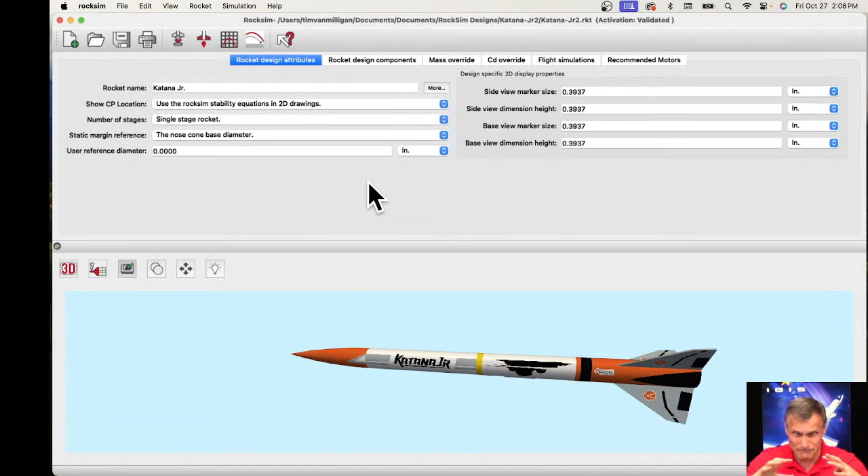But we've been designing RockSim, particularly RockSim Pro and the Launch Visualizer. They're three-dimensional, and we bought the maps of the Earth. We use Bing Maps, maybe I'll show you that in a minute, to generate the Earth like it's a globe, but we don't have that for the moon.

I think Google has those maps available, but they don't have an API that we can plug into, which is why we're using Bing and Microsoft rather than Google. I like the Google Maps better myself, but Google doesn't make them available to people like us, whereas Microsoft doesn't care. So we're using the Microsoft Maps. If Microsoft had a moon map, we probably could do it.

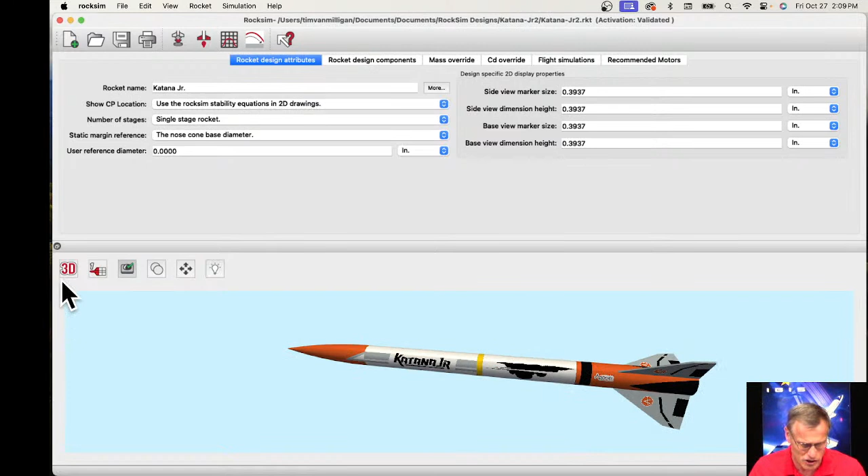Sturk03 has a question. Can you run a dual deploy in RockSim with a drogue parachute deploying at apogee and then a Jolly Logic deploying at 500 feet? Will it give accurate data? Okay, I got the Katana Junior here, and the Katana Junior isn't actually a dual deploy rocket. We have two parachutes in here, one down here and one up here. So he wants to know, how do you set it up to do a main parachute at 500 feet?

So the question is, how does regular dual deployment differ from chute deployment with a Jolly Logic Chute Release? For those of you that don't know what a Chute Release is, if you come to the Apogee website and type chute release in our search bar, it pops up. So this is the Chute Release, and what it does is it reefs the parachute. There's all the parts. Basically, this is the little electronic gizmo, and there's a rubber band and a pin.

You take this part and you wrap it around your parachute. There's the pin. You wrap it around, there it is. This is a little altimeter, and you can set the altitude at which the pin is released, and then it unwraps the rubber band, which releases the parachute so it can deploy. So basically, it reefs the parachute and prevents it from opening until it gets to a certain altitude. It just uses a rubber band; there's no pyrotechnics in there. It just pops it out.

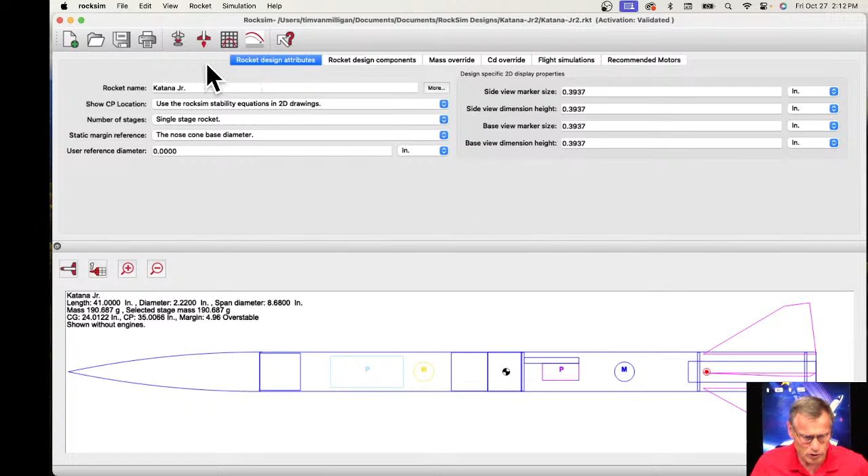A typical dual deployment will have electronics here in the payload bay, and a parachute on this side and a parachute on this side. To run a dual deployment, we load rocket motors. I'm going to choose a rocket motor, it doesn't really matter, the F20. Then you go to flight events, and I have two parachutes. The first parachute is 12-inch diameter, so I'm assuming it's this one right here. And then there's one over here. This looks to be bigger, so that's 24.

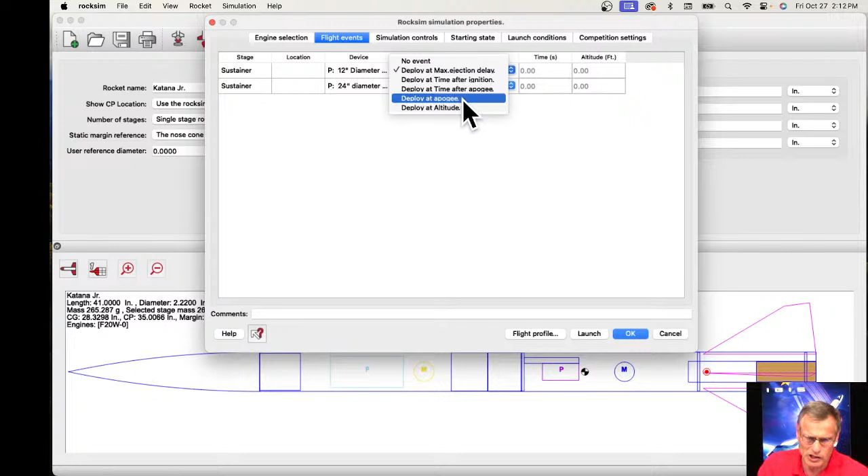My first one I'm going to deploy at apogee, and the next one we will deploy at an altitude, I'm going to guess 500 feet, but we have to make sure the rocket goes that high, and I'm not sure this rocket with an F20 is going to go that high. We'll find out pretty quick. Looking at the starting state, the rocket is on a 98-inch launch rail. We'll probably make it 60 inches using a launch lug. Launch straight up.

We're at an altitude of 700 feet. I like to run my simulations at 700 feet, just because that's kind of like somewhere in Iowa, so kind of the middle of the United States. So that's kind of how I picked it. It's nothing really special. You can choose wherever you want.

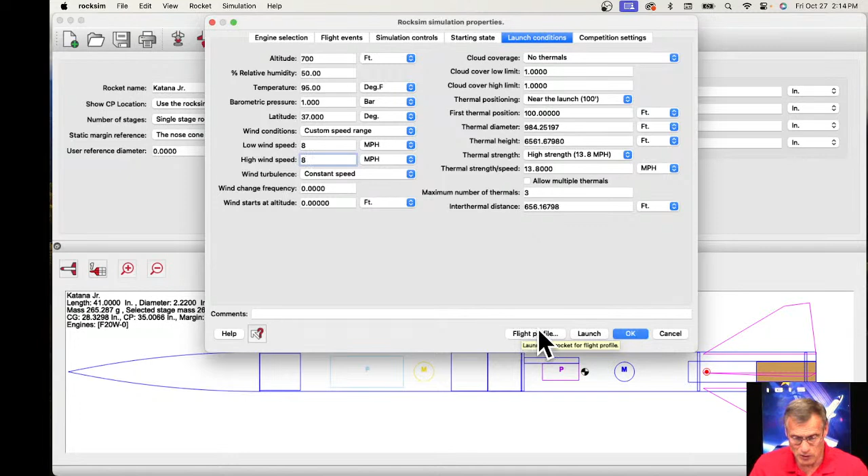And I'm going to have a custom speed range. What I'm going to do is set both of them at 8 miles an hour. So basically, this means it's a constant wind blowing across the field at 8 miles an hour, which is fairly breezy. And then we launch it. And it ran the simulation, and I'm peeking here. We went 2,026 feet. So our rocket did go greater than 500 feet, which is good.

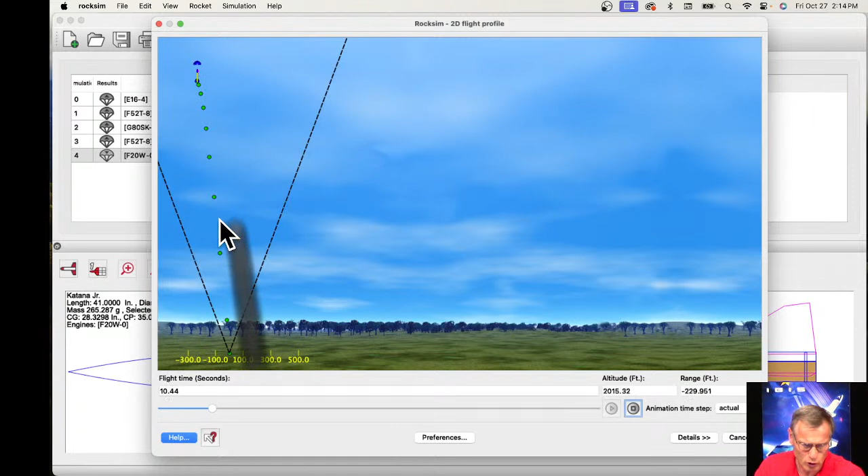So I'm running the simulation by clicking the start button over here. You can see the rocket taking off. This is the smoke drifting. So about this altitude, the motor burned out, and then it coasted. And then we have the first parachute deploying at apogee, and when it gets down to 500 feet, and you can see down here, I'm looking for 500 feet, the main parachute will come out.

Now the image of the rocket in RockSim doesn't change, so the parachute's not going to change. But what you'll see is the trajectory line is going to go more horizontal when we get to 500 feet because it's a bigger parachute. So basically it's drifting with the wind as it's descending. And since it's descending slower and the wind is blowing it, it's going to kind of change course. So we're getting close here.

All right, so now we're below 500 feet and you can see something change. See that little dog leg? This is typical of dual deployment rockets. And so then the rocket's going to come down. I'm just going to speed it up here, and it landed down here. So now you can really see the dog leg. These dots here in RockSim are 1 second apart. They're closer together here because the rocket is falling slower. So that's a typical dual deployment rocket.

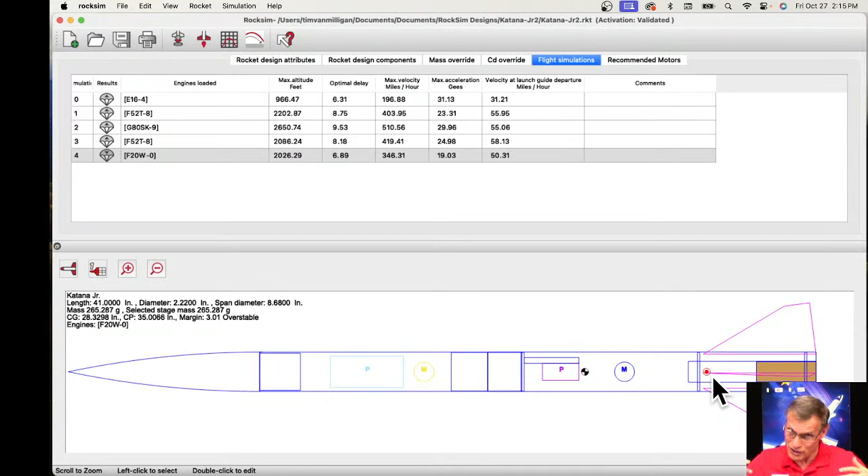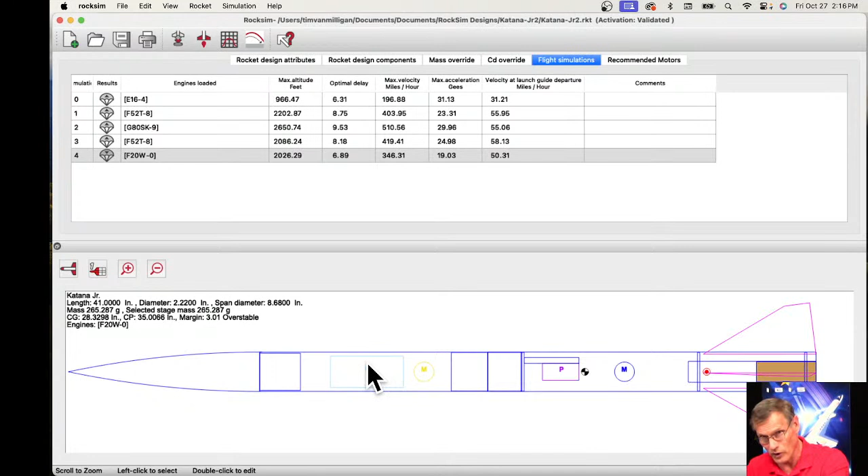So how do you set up a Jolly Logic differently in RockSim? And the answer is it's identical. We just launched a Jolly Logic Chute Release in RockSim. The only thing is that the parachute is still in the tube. So basically we have to move the parachute in the rocket to where it can come out of the tube. RockSim doesn't care. The flight event says deploy the parachute out of the rocket, and that's what we did. How it gets out of the rocket, RockSim doesn't care. It's not smart enough to know. You have to know yourself that the parachute has to be pushed out of the rocket.

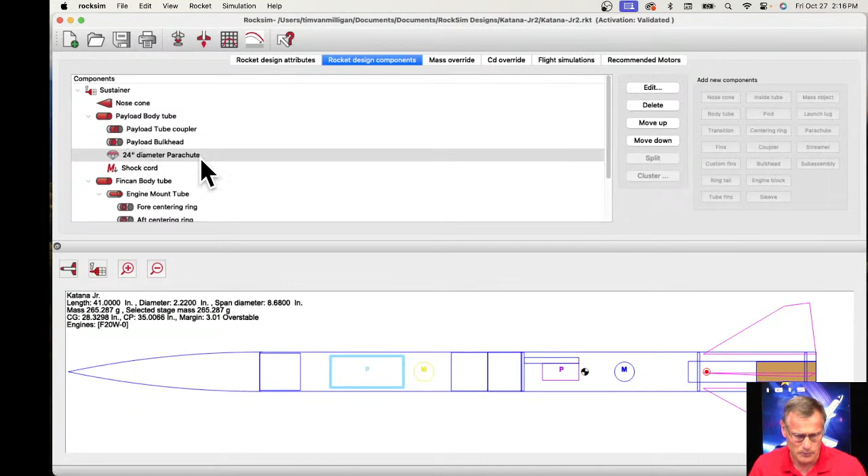Now, if you're smart, what you would do, as I said, is take this parachute and move it into a location where it can be pushed out. So I would find this parachute, and you can just click on it. It tells you where it is in the parts tree. Then you can just double click to open it, and then we can change the location. You can see I can slide it around, and I can slide it into that back tube.

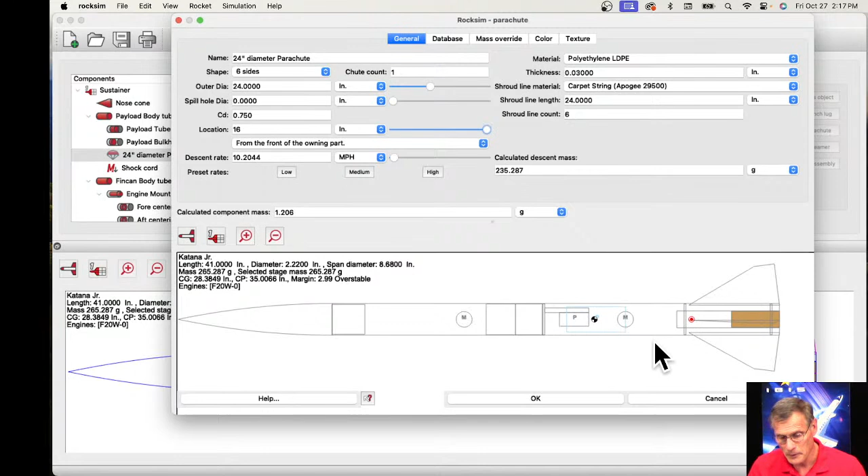I've moved the slider as much as I can, but here's the trick. You can always type in a number that's greater than what the slider bar allows. So if I type in 16 inches, you can see my parachute, this nice light blue parachute right here, move further back in the tube. And basically, we've done a deployment with a Jolly Logic. Running the simulation is identical, so you don't have to change that. But that was a nice, easy question for me to start out with.

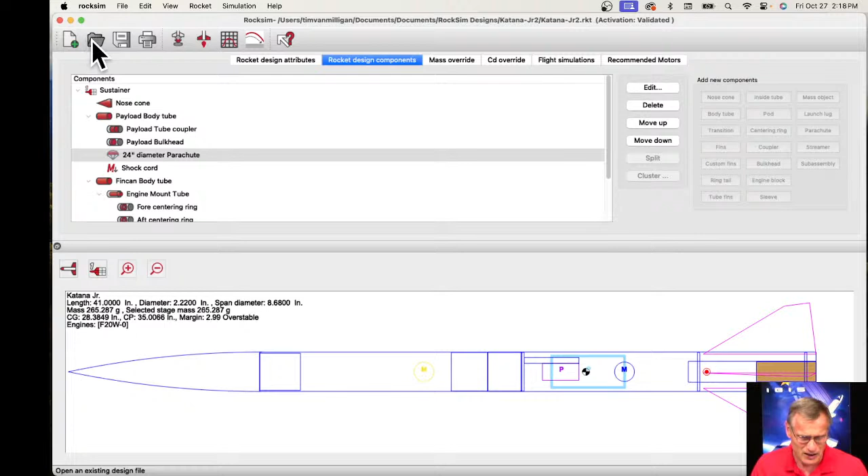Jeff Gortowski says, I imagine Heli-Rocs are just really long strakes for simming. Yes. Because we can't simulate a rotating recovery device in RockSim. That's just so complicated. So if you look at the Heli-Roc design in RockSim, you would find that what looks like blades are just fins, and fins can't be deployed.

So let's see if I got the Heli-Roc here. So basically, it looks like the rocket going up, but coming down. Heli internal blades. I don't see it.

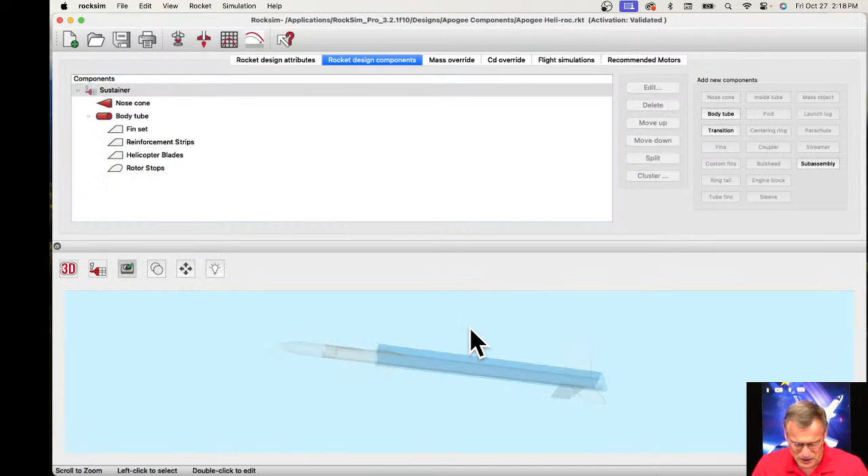Let me type it into a search bar, and then let me scroll down. Heli-rock. So open that up. Do I want to save that one? No. Okay, so this is what the Heli-rock looks like going up, and these blue blades are actually fins. You can see this is right up here. It looks just like a fin set, and basically that's how we put it in.

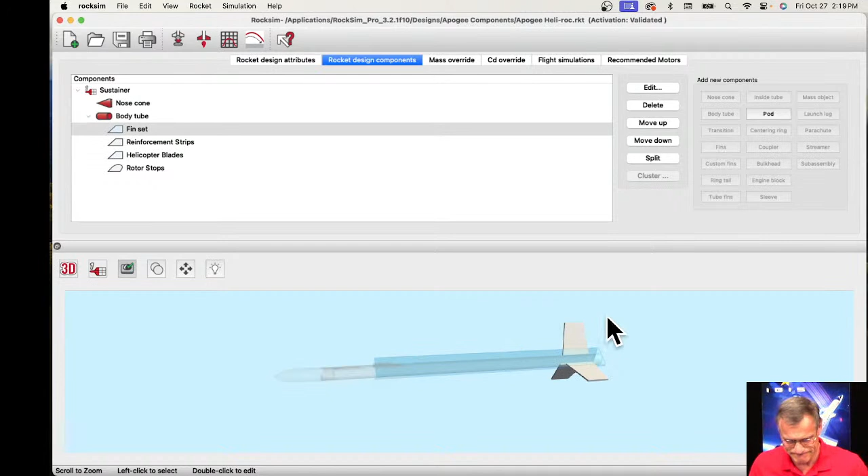But it doesn't spin coming down. So basically in this configuration, we can get a prediction on how high it will go, but we can't predict how slow it's going to come down because I can't spin the rocket coming down. But that was a pretty good observation.

Jeffrey's talking about the moon. The chute has nothing to do on the moon. Yeah, deploying a parachute on the moon, not going to do anything.

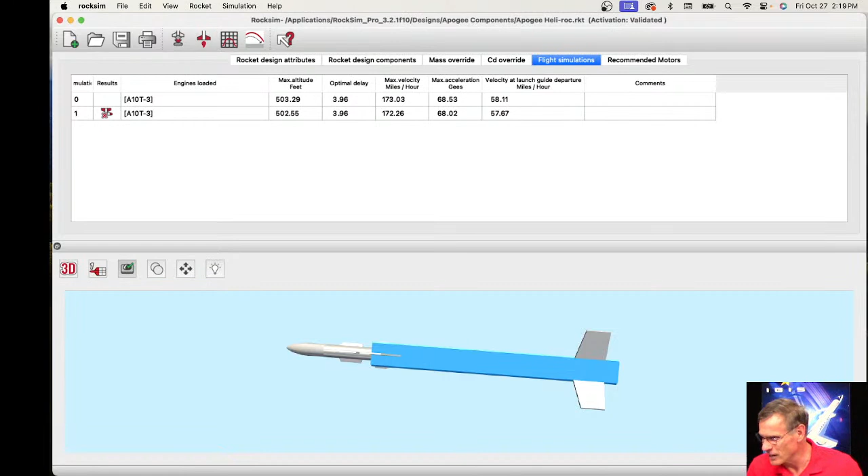Julie Kaufman says, how to start a design for a level 3 rocket. Okay. Well, designing a rocket, it doesn't matter if it's an L3 or an L1 or your very first rocket like an Alpha. You're going to start out designing it the exact same way. So basically, when you're designing a rocket, what I do is draw a picture of the rocket on a piece of paper. Just sketch something out, what you think it's going to look like. From that, now you need to start selecting parts.

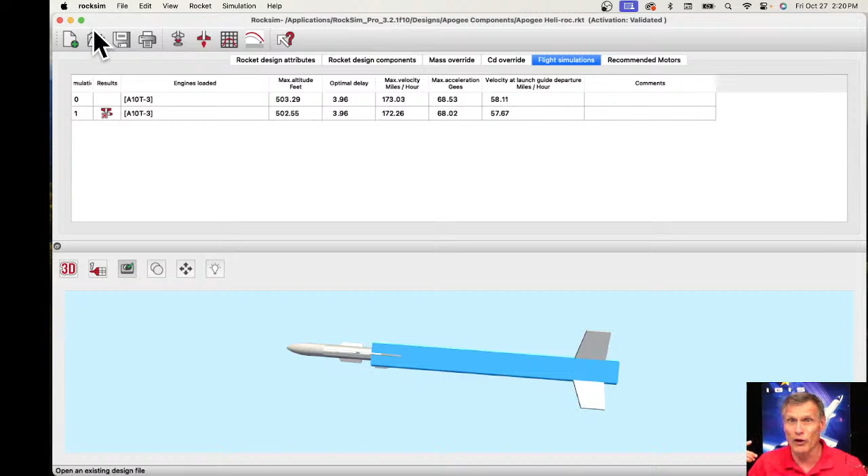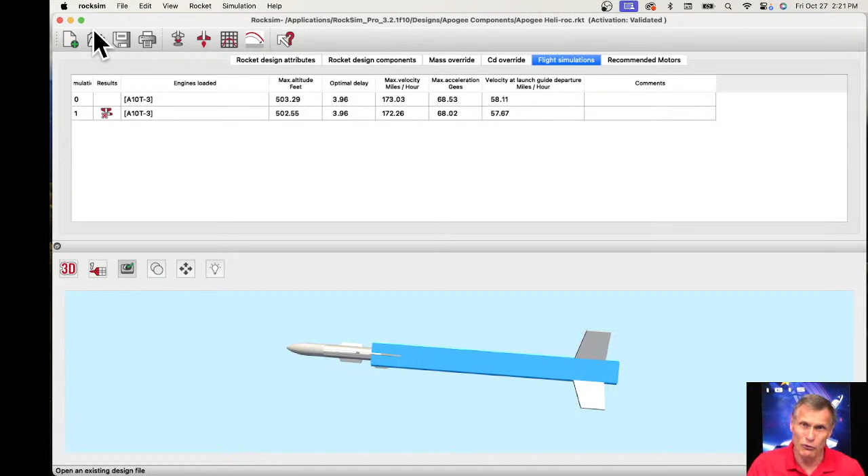So now an L3 rocket, that's a big rocket. L3 means you're flying an M motor or bigger. So you can do an M, an N, and an O. So you're going to be talking big components. An M motor is 4 inches in diameter. So at a minimum, the rocket's going to be 4 inches in diameter. Typically, they're going to be bigger. So now you got to find parts.

So what I would do is I would go to the Apogee website. What we're looking for is just parts to design our rocket from. And then once we have some parts, mainly the nose cone, then we can start going into RockSim. So I'm going to go down, click on the shopping menu, come down to building supplies, and then come over to nose cones. So here's nose cones.

And so it has different sizes, 24 millimeters, which is about an inch, 29 to 54 millimeters, about 2 inches, 56 to 98, so 98 is 4 inches. So this is kind of like the smallest nose cone. And then there's ones that are 5 inches or larger. So for me, and this is your personal preference, is how big of a nose cone do you want to use?

I did an L3, and I used the PNC 7.51. So this is a big nose cone, and you can see the nose cone length. It's 22 inches long, and that's from the shoulder to the tip. It's 7.6 inches in diameter. So now I have a nose cone. So now I can start going into RockSim.

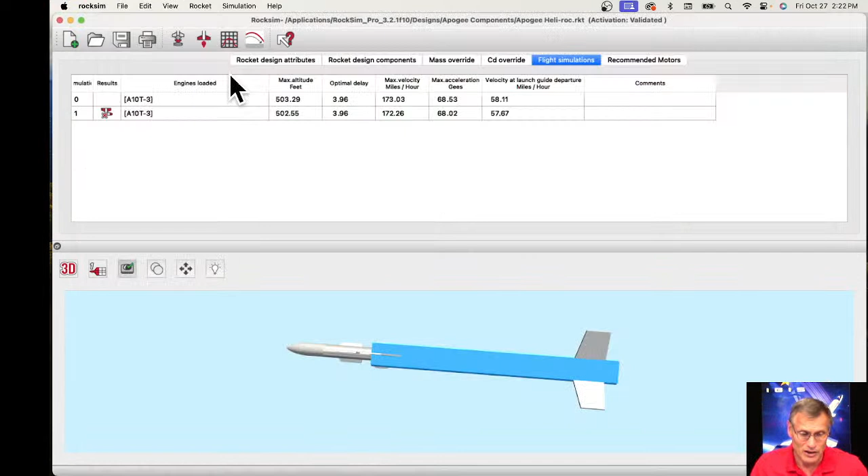So in RockSim, I would start out by doing a new design. So click on the new button over here, and it's going to ask if you have a design open, whether you want to save it or not. I'm not going to save it, so I'll just click no. So I'm going to start a new design, and we're going to work across these tabs here. So the first one is the rocket design attributes, and we might give it a name, L3 rocket. And we're going to use the RockSim stability equations.

The side view marker size, this is like the CG symbol and the CP symbol. Right now, they're going to be drawn at 0.39 inches in diameter. That's good for a small rocket, but when we got a big rocket, we're going to be a 7.5 inch tube. I want my marker size a little bit bigger. So this is just a little tip. I'm going to make it 2 inches in diameter. You don't see anything yet, but you'll see it soon.

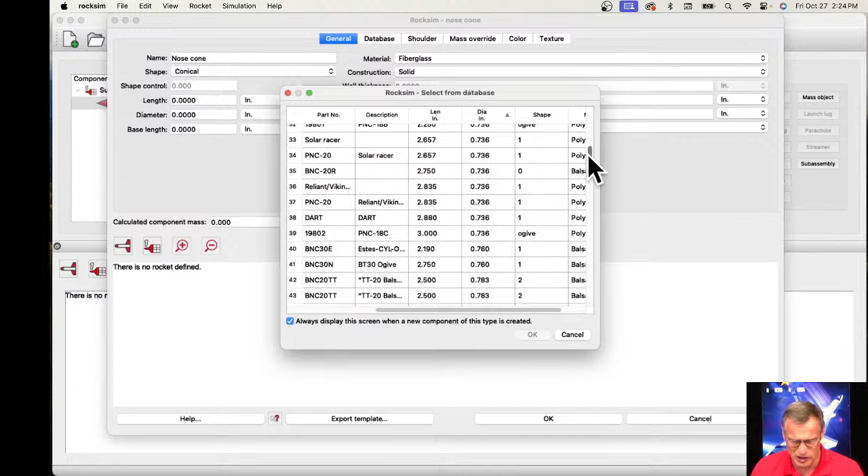So you can see my center of gravity symbol is pretty big, and my center of pressure. So that's what I wanted to do. I wanted to make them big. If you would have left the side view marker size small, they would be like really tiny. And I want to be able to see them.

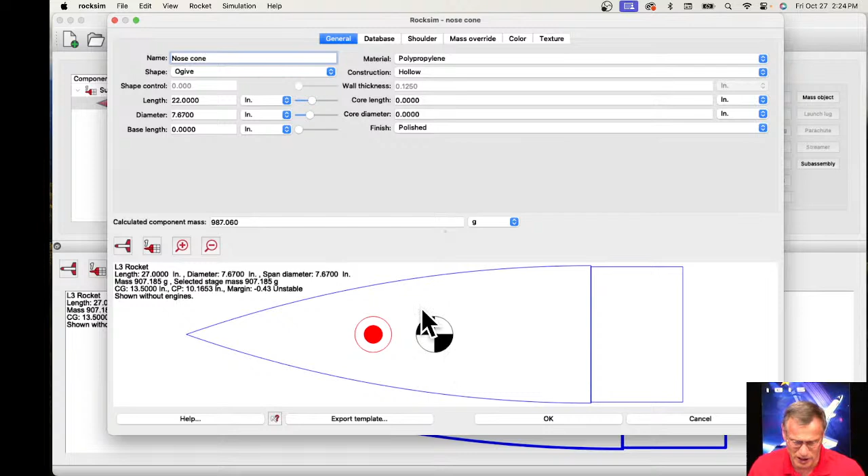So then I click OK. Next component, we're going to add a body tube. So when I design a rocket, I start at the top and work down, so the tip of the nose cone down to the bottom of the fin.

So let's put in a body tube, and it's going to, again, look in the database, and I want to get that outside diameter at 7.67. So I'm just going to scroll through the list. I'm looking in this column right here for the big 7-inch tubes, and you can sort it. There we go. So I can choose this one right here, 7.51 inch. Click OK.

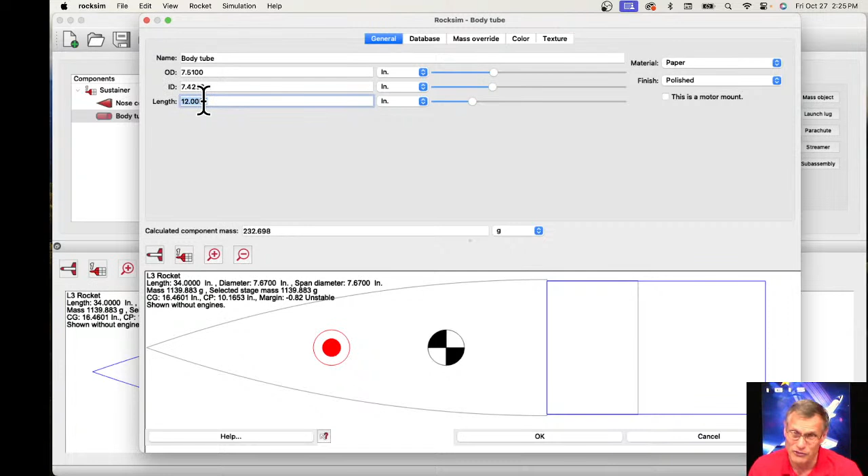And it loaded it, but it's pretty short. It's only 12 inches long. So now from here, I'd make it longer. Let's make it 60 inches long. Maybe let's go 80 inches, another 20 inches. I want a little bit longer. This is again my personal preference.

I want to design a rocket that's stable, and I know that a length to diameter ratio of about 10 is going to make it pretty easy to make it stable. So if my diameter is 7.67 inches, then I want my length of the tube 10 times that. So at least 76 inches, and I made it 80 inches. So that's kind of where I got that number of 80 inches. This is not going to be the motor mount tube. We're going to put a motor mount tube in here later.

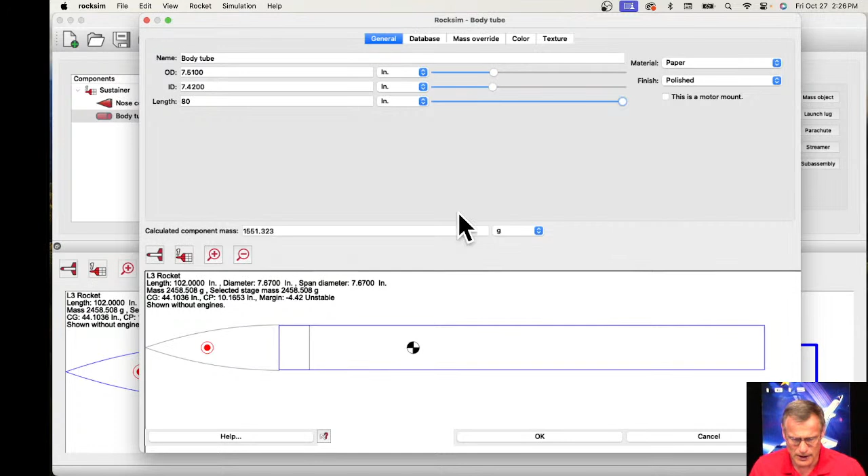And I'm going to change the color. This is my 3-dimensional color. I'll make it orange. And the 2-dimensional color, let's also make it orange or yellow. I'll make it yellow. Click OK. Oh, yellow's a hard color to see. There, make it a darker yellow. There you go, now we can see it.

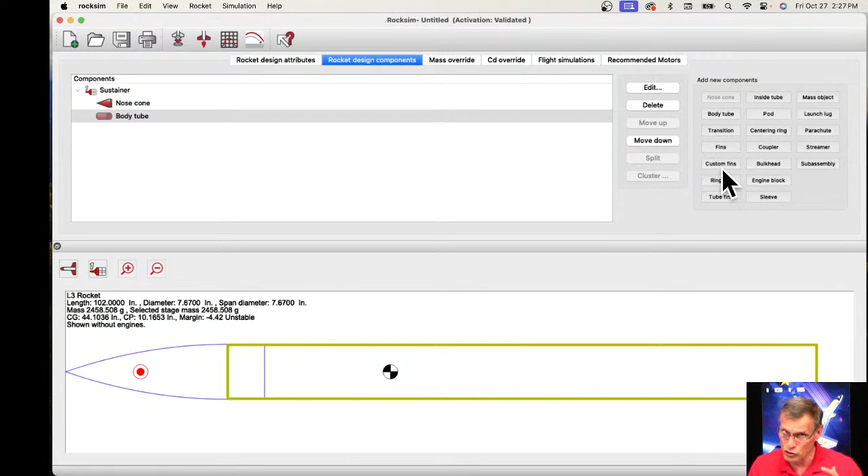All right, so now I want to add fins to my body tube. So I have 4 choices of fins. I have regular fins, which are trapezoids or elliptical. Then I can do custom fins, which are any shape other than or including trapezoids and ellipses. Then I can do ringtails or tube fins, but I'm going to do just regular trapezoid fins.

And it always looks in the database, and I'm going to cancel out of that. Once it's done looking in the database or you canceled out of it, RockSim is just going to draw some generic fins on here as a starting point, and that's all it is. So now you can start changing, and I think these fins are massive. Each fin is 15 inches long. That's wider than any piece of plywood that I have.

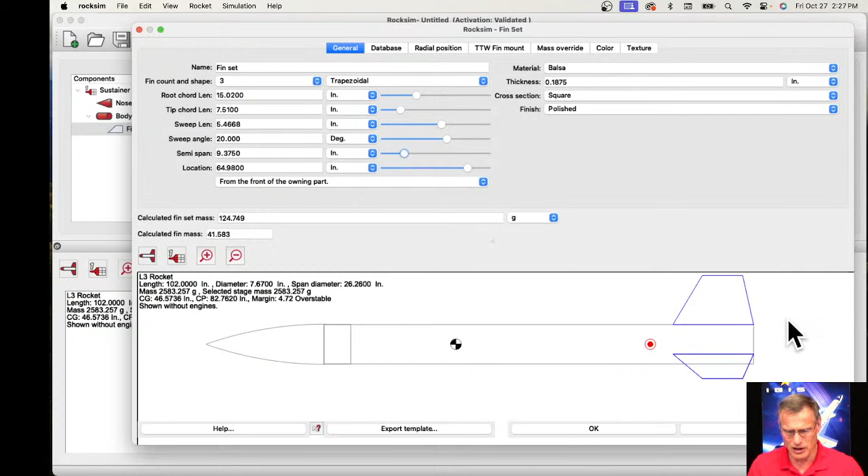So I'm going to make it like that. And that actually looks pretty good to me. I'll just leave everything else, but you can move the slider bars around and change the shape to whatever fits you. Next, select the material. Since this is a high power rocket, balsa fins, probably not a good idea, because balsa is probably not going to stand the stresses of a high power launch.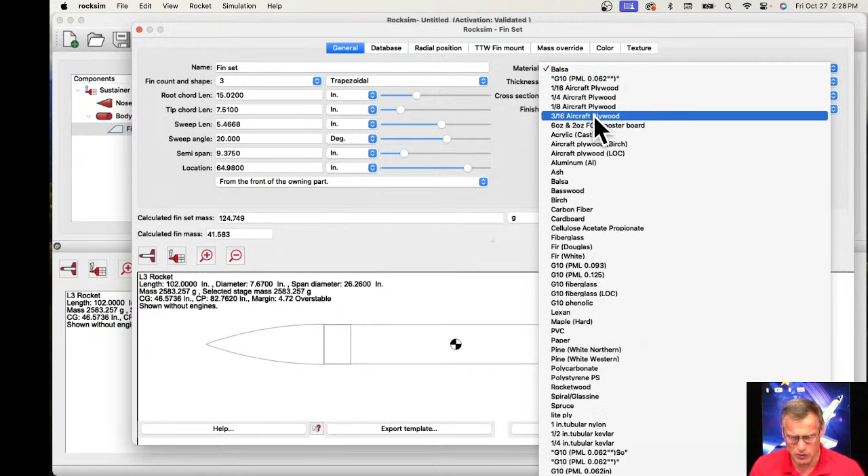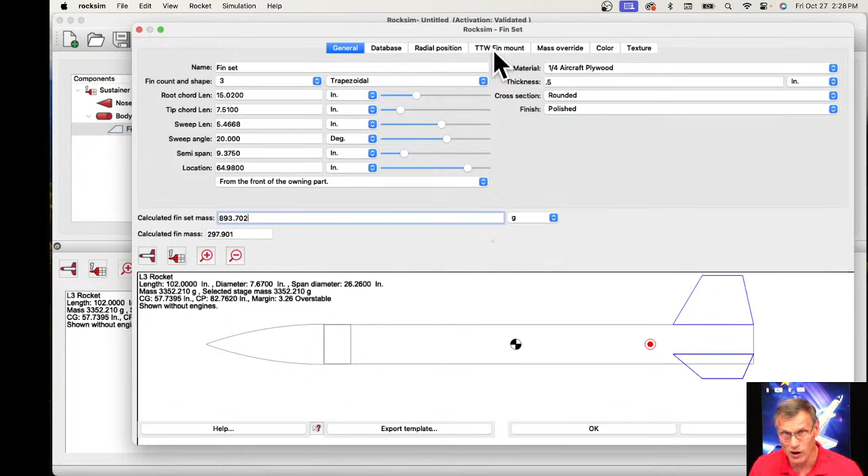So I'm going to make these plywood, and I'm going to use a 1/4 inch plywood, and I actually might make these even thicker. I'm going to make them 0.5 inches thick, and I'll make them rounded on the front edge and the back edge, so a little bit more aerodynamic. And then we'll come back to through the wall in a minute. The color, I think we had orange, and let's make this one that color. Okay, so there's my fins on the rocket. Rocket is coming along pretty good.

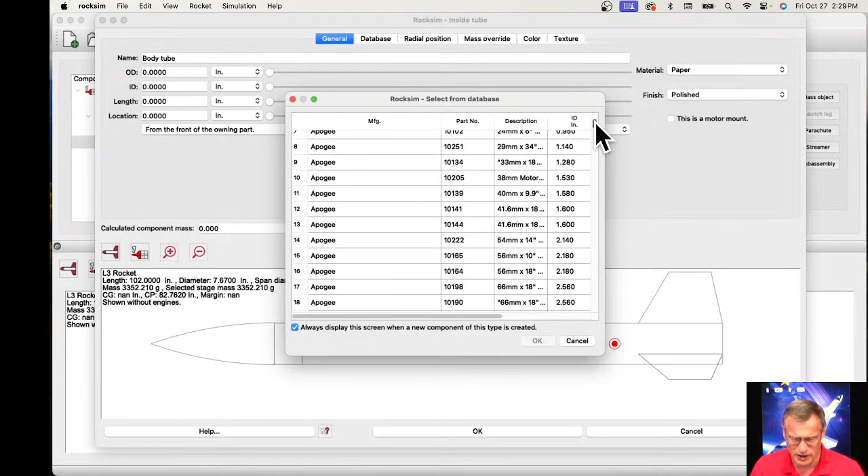Now we need a motor mount inside of it. So I'm going to highlight the tube and do an inside tube. And now we're looking for a motor mount that can handle a 98mm rocket engine. So that's 4 inches in diameter. So I'm looking for something that says 98mm or that's an outside diameter of 4 inches. So we'll use that tube right there. Click OK. You can see it drew it right here.

It's in the wrong spot. So I'm going to change the reference location from the front of the tube where it is right now to the back of the tube. And by doing that, I can change the length of the tube and the motor mount will follow it. So now I'm going to move this all the way to the back. So it's 0. You can see now my back edge is at the back of the tube. It's 34 inches long. I think there should be enough area in here for a big parachute. We're going to say this is a motor mount tube.

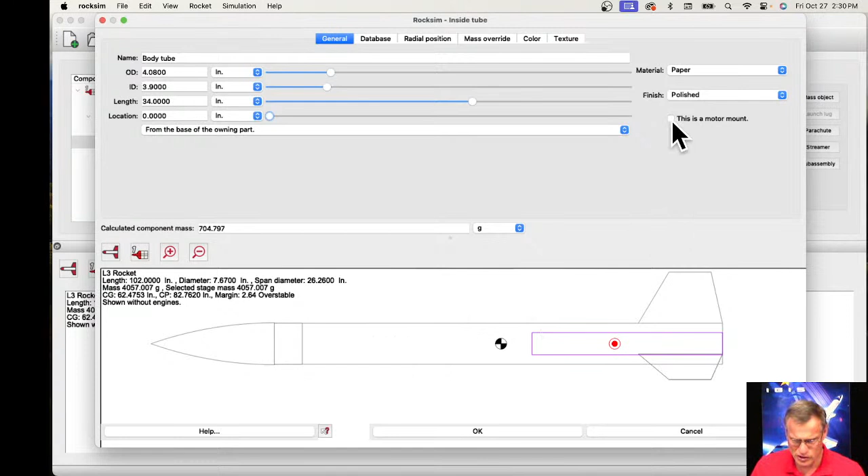And let's change the color. My rocket's going to be orange with a blue nose cone. The 2D color doesn't really matter.

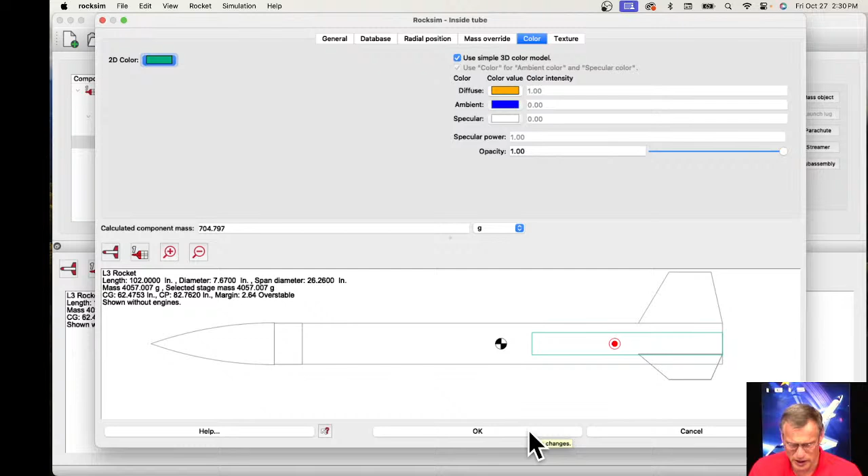Click OK. So now we have the motor mount tube. Now we need fins, or not fins, centering rings. So we're going to put some centering rings in here. So I'm going to click on the body tube, come up here to centering rings. I'm looking for the component centering rings right here. Click on that. We're going to cancel out of the database. We're just going to let RockSim calculate it for us.

And it's already calculated the outside diameter at 7.42 inches. It knows the inside diameter of that tube. This green line right here is the centering ring as it is right now. Again, I'm going to make these pretty thick because they got to be strong for an M motor. So it's a 1/2 inch.

And this is where it takes a little bit of experience. You know, this is why there's a certification program, because as you go up the levels, you gain experience, and then you know from your own experience that thin plywood is probably not going to withstand the forces of flight, and I need to make it thicker. So my thickness is based on my experience.

And then I'm going to change again the location from the base of the owning part, and then I'm going to slide it back and watch what happens to the inside diameter right here when I slide this ring over this tube right here. You'll see that the inside diameter suddenly changes. So RockSim is pre-calculating that. So this is my front centering ring, so I'm going to put it like right there.

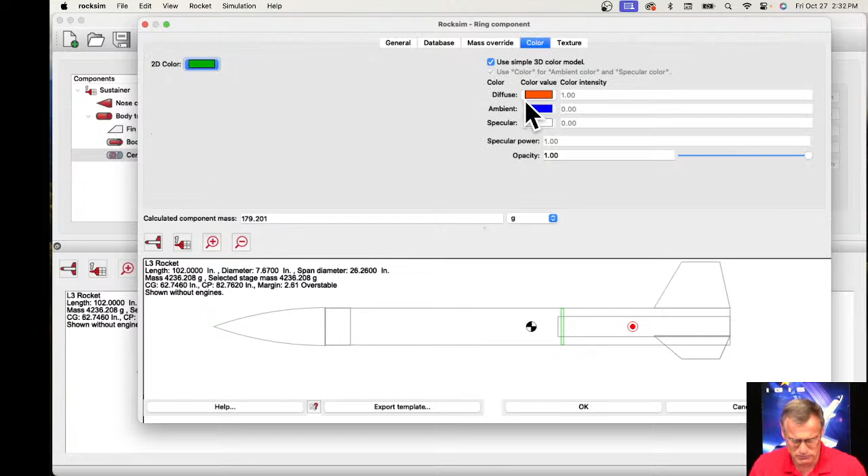Again, it's plywood, and color is fine. Click OK. So there's my first centering ring, and now I'm going to do another centering ring, and this time I'm going to do a copy and paste. So I'm going to highlight it, and then I can go either to the edit menu and copy, or I can do a right click with the mouse, and it brings up this contextual menu. And then from that, I can select copy.

And then I'm going to paste it onto the body tube. So I'm going to highlight the body tube and then bring up the menu again and hit paste. And you can see it put another ring here, but it put it exactly on top of the first one because we just basically copied it. Now we need to edit the location. So I'm going to double click on it. And I'm going to change the name to aft centering ring.

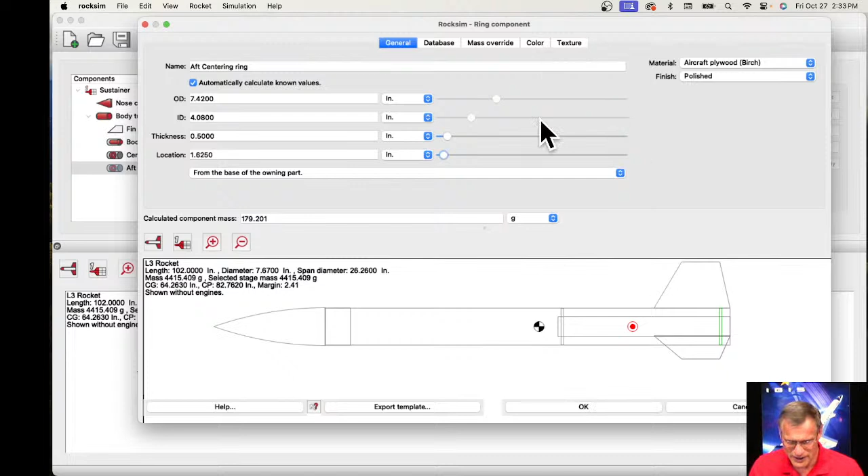And then I'm going to take the slider bar and I'm going to slide it almost to the back. I'll leave enough room on there in case I want to put a screw-on retainer. Yeah, I'll do that. Then click OK. So now we have the forward centering ring and the aft centering ring. If you want to put a retainer on there, that would probably go on as a mass object. So how much does a retainer weigh?

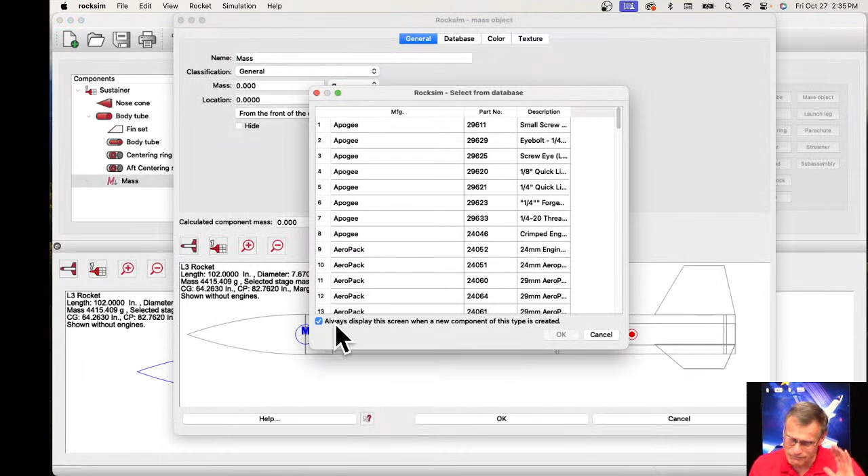So right now I put the mass object at the nose cone. We are going to give it a mass of 230 grams. You can see when I changed the weight, it moved the center of gravity of the rocket. And I'm going to put it from the base of the owning part, and the owning part is the body tube. You can kind of see which parts are owned by what. So the mass is underneath the body tube, so that's where it's going to be.

And then we need to change the location. I'm going to slide it almost to the back of the rocket. So a mass object shows up as a circle. In 3 dimensions, it actually shows up as a sphere. So it looks kind of crazy. Let me show you what that looks like. If I spin it around, oops, I'm not seeing it.

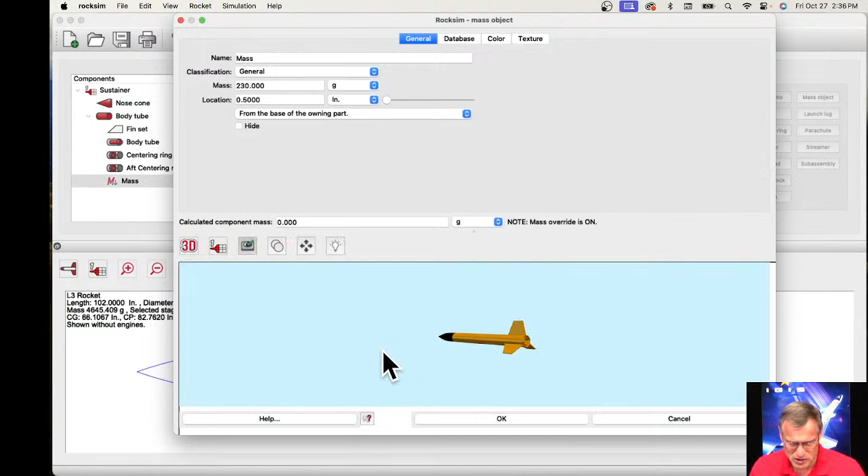I was going to show you a little trick, but I think I've turned the little trick already on. Under the color, I've turned the opacity down to 0, so I made it translucent. If I turn the opacity back on, we'll see our sphere. So there's the sphere, the blue sphere right there at the back.

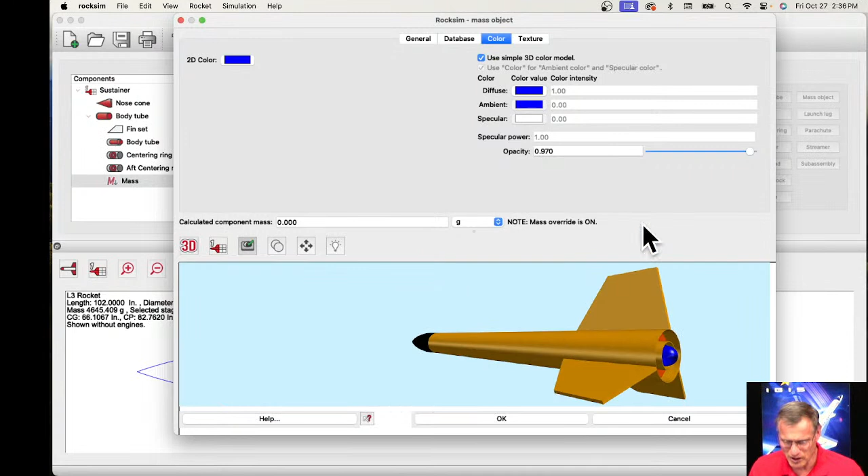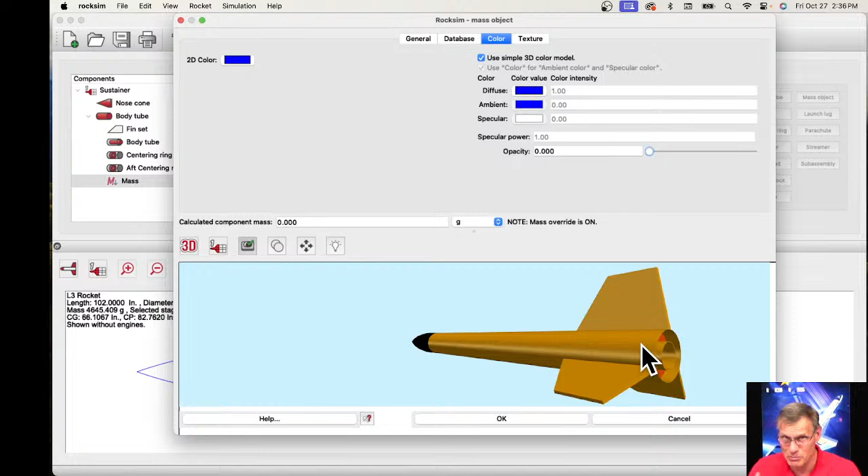But it looks kind of creepy, so I'm turning it off by making the opacity 0, because a mass object, it's the mass of the item. A retainer doesn't affect the aerodynamics of the rocket, so that's why we don't have to worry about it so much, why we can substitute a mass object. All right, so let's go into the General tab, and let's call this the motor retainer. Okay, so we added the motor retainer.

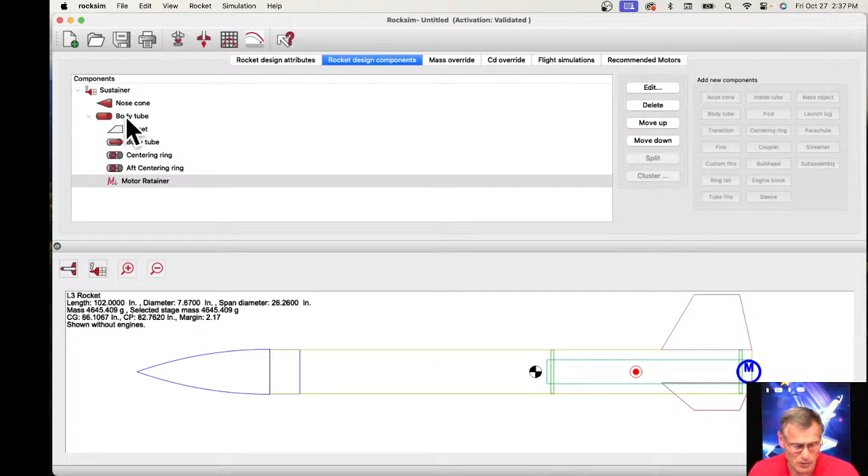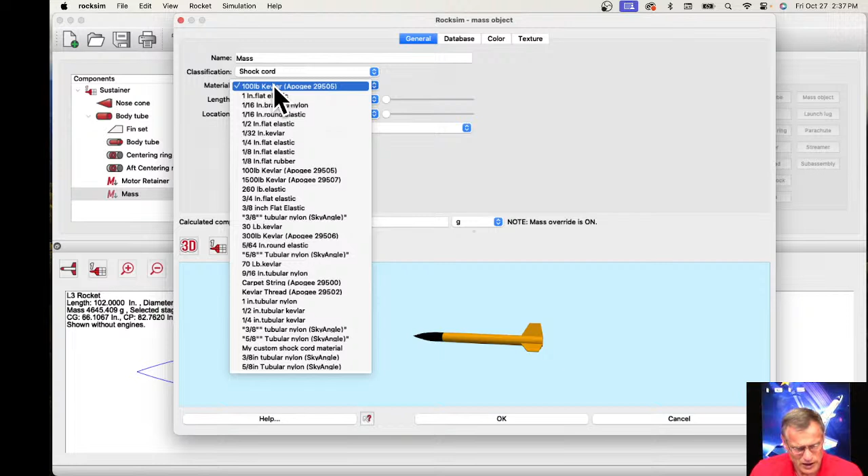Now we need to add a parachute and a streamer. Oh, not a streamer. Parachute and a shock cord. So again, highlight the body tube. Let's put in a mass object for the shock cord. So this mass object is going to be a little bit different. Before, when we did the retainer, the classification was general. This time we're going to highlight that and select shock cord. And then we're going to select the material. And I want something really good. Here's 3/4 inch flat elastic.

And now we need to change the length. Let me change it to 2D here. So here's the mass object for the shock cord. And the length, you know, it might be 20 feet long. 20 feet times 12 inches is 240 inches is 20 feet. And if I could have done that. RockSim calculated it on the fly. So there's 20 feet of 3/4 inch elastic. That weighs 74.8 grams. But we want to put that down over here.

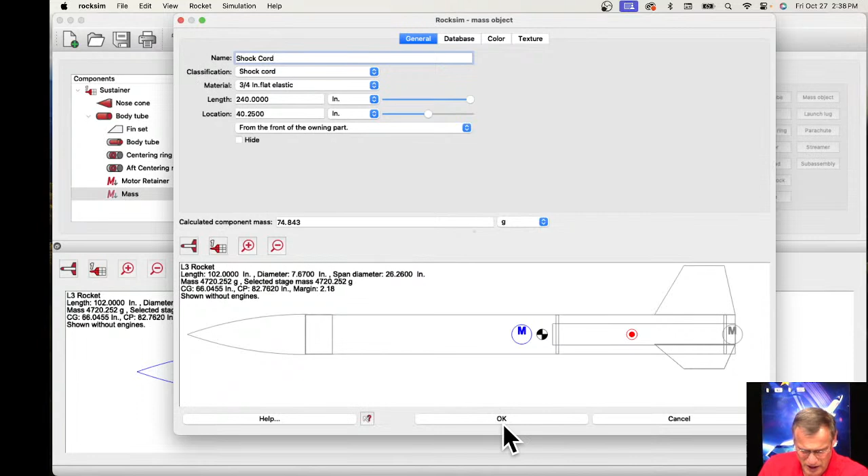So I'm just going to grab the slider bar and just move it like right there. That's probably where the shock cord is going to go. We can change the color if we want. We'll just leave it alone. Oh, I should have changed that mass to shock cord so we know what it is. And then click OK. Now we want to put in a parachute. So again, select the body tube. And where's my parachute? Parachute right here. All right, and I'm going to click cancel out of here.

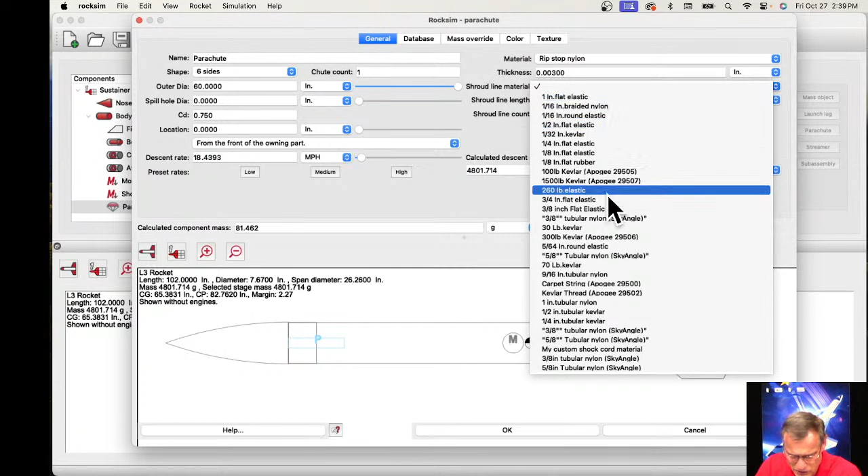This time, I'm going to let RockSim pick a parachute for me. It has some preset rates, and this will change the diameter of the parachute based on whatever rate I select. So if it's a low descent speed, I click on that, it tells me I need a minimum of 60 inches. I'm going to make this a ripstop nylon, give it a thickness, I don't know, 3 mil thick nylon, shroud line material. This is going to have to be some pretty heavy duty stuff.

Let's go with tubular Kevlar for our shroud lines and make the length, I don't know, let's try 72 inches. And I'm going to need a lot of shroud lines on this, at least 24. All right, so it gives me a descent rate of 18.4 miles per hour. The location of that parachute is right here. I'm going to slide it back a little bit further. I think this is probably a little too fast at 18 miles an hour. I'll probably want something bigger.

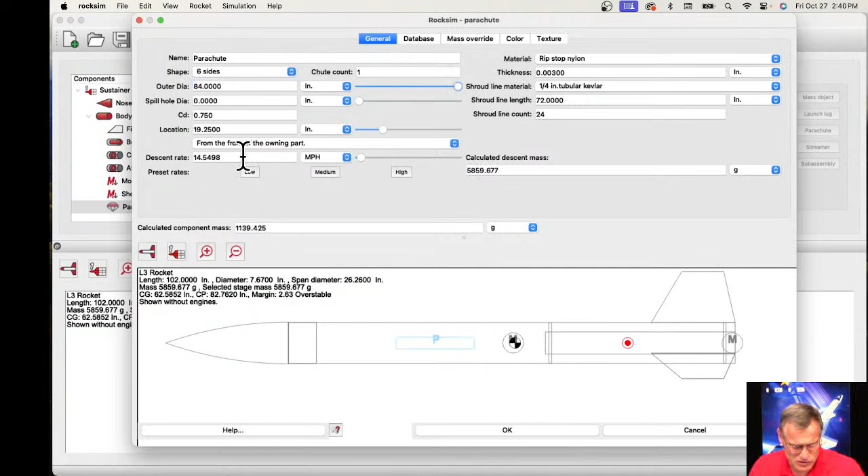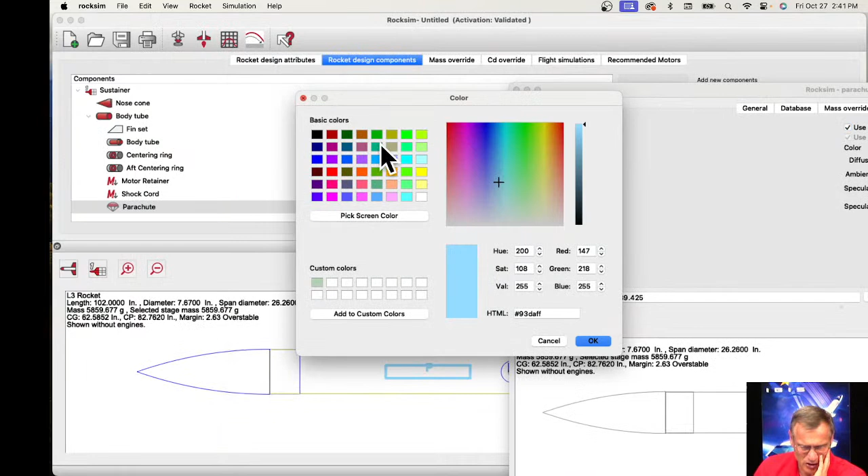So if I go to a 72-inch parachute, you can see now my descent rate is at 16. Still think that's a little fast. Let's try 84 inches. Now we're under 14.5 miles per hour. That should be slow enough. That's a big parachute though. And then the color is nice blue. I better make this 2D color a little darker. Oops, there it is. My color went underneath. Click OK. All right, so there's my parachute.

So at this point, I'm going to save the design. I'm going to throw it on my desktop. Oh, RockSim crashed. And I lost all the work I just did. Should have saved it. Occasionally it crashes. Oh, man. Let's open it back up. Oh, man, this is why you should save it. I was going to save it.

RockSim crashes. It's not very often, but when it happens, it's annoying. And it's always when you're opening a design or saving a design, never in between. So if you save often, it seems like if you can save it the first time, anything after that, it's going to be nice and stable. As far as saving goes, it's when you might open a new design that it might crash. But at least at that point, you got it saved.

Let's see if I can find something that looks similar to what we just did, so I don't have to do it all over again, because basically the rocket was designed. I'm going to go through my list and see if something has a level 3 rocket. Well, I got a level 2. This is the level 2 kit, which is a little bit different. There's a LOC Goblin. I want something big.

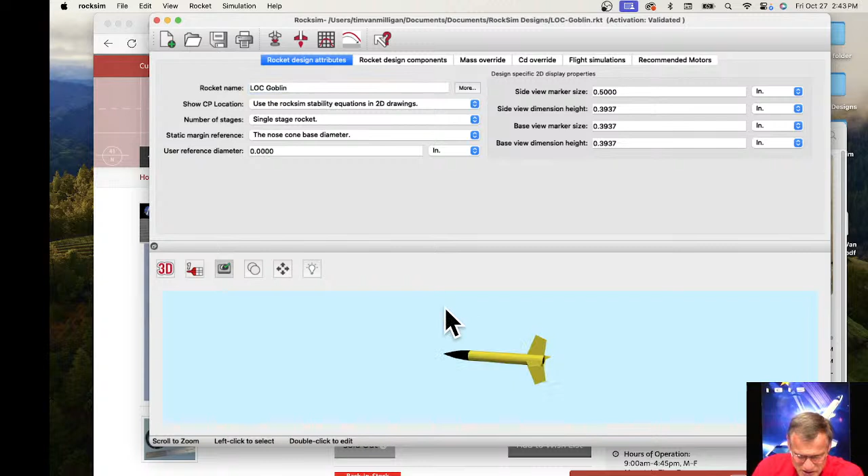What's something huge? We don't sell anything bigger than a level 2 rocket kit, but there are rockets that are huge. Well, we'll just use... what the heck? Like I said, there we go. All right, so this is a LOC Goblin. This is similar to what we just designed, it's just a little bit smaller. The rocket itself is 4 inches in diameter. So imagine it was 7.6 inches in diameter.

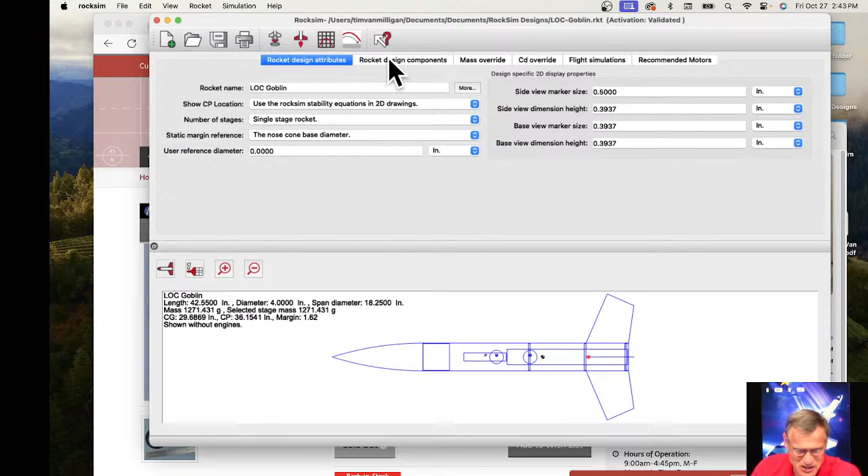And so now at this point you're just running simulations. So we're ready to run simulations. So you go to run a simulation. You click up here, rocket pre-flight right here. Brings up the simulation properties. And you're going to choose an engine. You might want to choose the biggest engine you can find. I can get a 54 millimeter L990 blue streak motor. And I'm going to have to do dual deployment on this because it doesn't come with an ejection delay.

So under flight events, I only have one parachute in here, so I can deploy it at apogee. Come on, select apogee. Click OK. That rocket motor just barely fits. That's too long, so I gotta find something shorter. Let's go with a K535. Okay, so that fits in there.

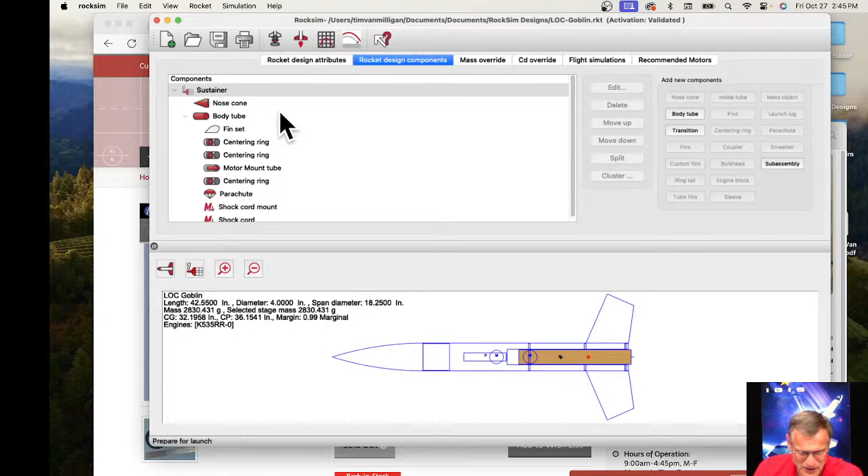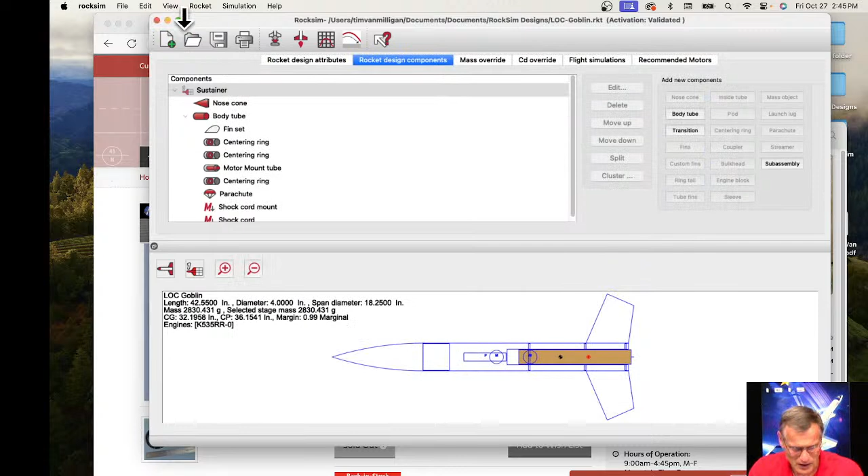And now go back to that. Flight events, deployed at apogee. We're still launching. We're at 98 millimeter. Our altitude changed. And we need to change this to custom. 8 miles an hour, 8 miles an hour. Click OK. I'm going to save it. I'm going to do file, save as, put it on my desktop. Okay, it's saved. Now we're going to launch it.

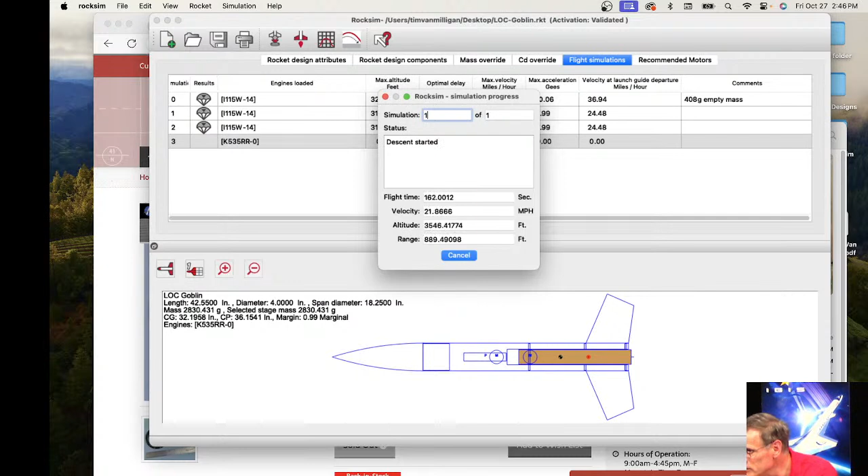So I can go back here and we can either click launch or flight profile. They do the same thing. The flight profile will bring up the flight profile though. It's still loading here. Terry Wheelock says, save early, save often. He's right.

So there's the rocket on the pad, and when we launch it, rocket takes off, goes up, and going pretty high, 6,000 feet. Still going, 7,000 feet. We're getting close to the top. It's slowing down. I can tell because the dots are getting closer together, and the rocket just went horizontal, so we reached apogee, and now our parachute is out. Remember, well, I don't know what size this is, but it's going to take a long time to come down.

283 seconds, so several minutes to come down. And it drifted 2,313 feet downrange. So this is a good case for dual deployment. And like we did before, basically to run dual deployment, you just need 2 parachutes in the rocket, because RockSim can't tell how they're deployed. It just needs to know that there's 2 parachutes.

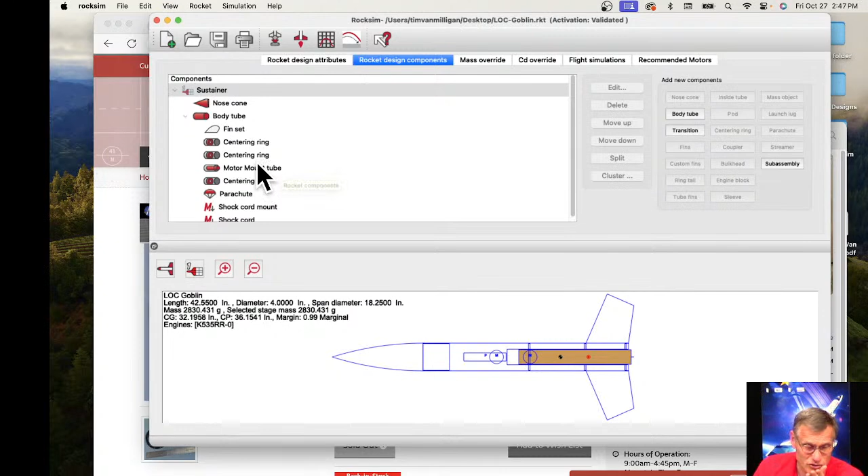So if I select the body tube and add another parachute, here's another parachute. And we'll make this one 18-inch. So let's make this the smaller one. We'll call it the drogue parachute so we can tell it apart. And click, oh, well, it's right here right now. Oh man, the thickness is huge. Okay, so it's still in the wrong location. So let's move that location back here. Right there. Oh, I moved it too far back.

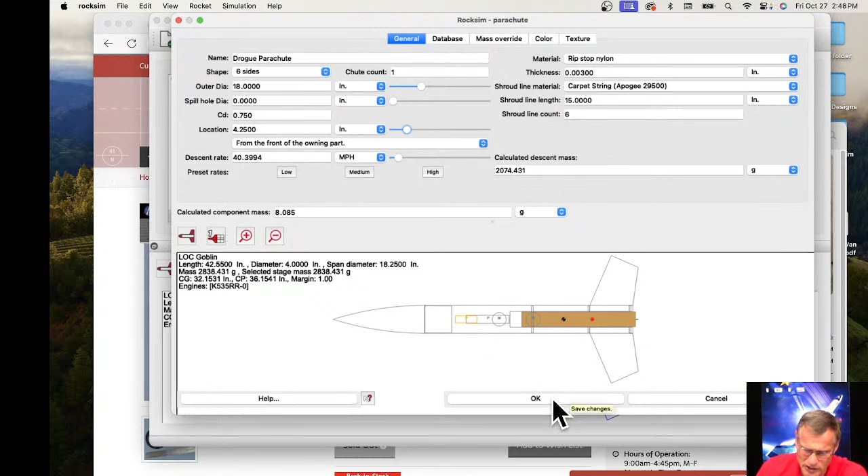So this would be like a configuration where you would use the Jolly Logic on the main parachute. They're both kicked out. The small parachute immediately inflates, but the big parachute is held together by the Jolly Logic chute release, and it's not going to deploy until we get lower in the sky. So let's do a simulation. Flight events. So now we'll see 2 parachutes. We have the regular and the drogue.

So this one, we'll select it at deployed apogee, and then the big one, let's deploy it at an altitude of, what do we say? This one went over 6,000 feet. Let's deploy it at 500 feet. So just type in 500 and click flight profile. Okay, and when it gets done,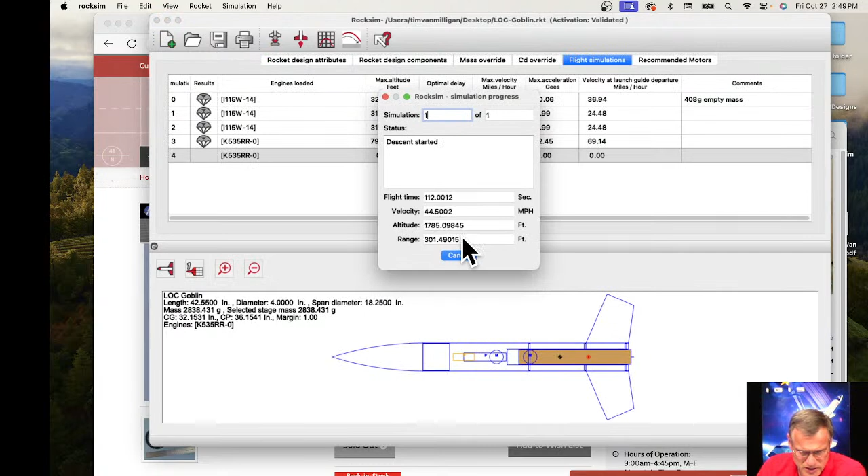okay, so see, they roughly went the same height. There's a little bit of difference because this one actually went higher, even though we added another parachute. So basically you have to ask a question, why did this go higher when we added weight?

Well, there could be a number of reasons for that. One is there's an optimum weight for every rocket motor based on the configuration of the rocket. It's kind of like a wiffle ball versus a baseball. They're about the same diameter, but which one can you throw farther, a wiffle ball or a baseball? And the answer is the baseball, even though it's heavier, but there's an optimum weight, and the wiffle ball is way too light. It doesn't have enough momentum once it's going to counteract that drag. So that's why sometimes a heavier rocket can go higher.

The other thing is maybe the trajectory changed. Maybe because it had extra weight, it wasn't affected as much by the wind, so it didn't weathercock into the wind as much, and so it went straighter. Could be either one of those. Without digging into it, I couldn't tell you.

But we'll launch the rocket. The rocket takes off, and I'm going to speed things up because I just want to see it get to apogee. So at this point, the drogue parachute came out, and then we're going to move it along until we get to 500 feet. And then our main parachute came out at 500 feet, which was right about there. And this time it only landed 736 feet downrange. So by doing dual deployment, we saved ourselves a lot of walking time. So that's what the trajectory will look like.

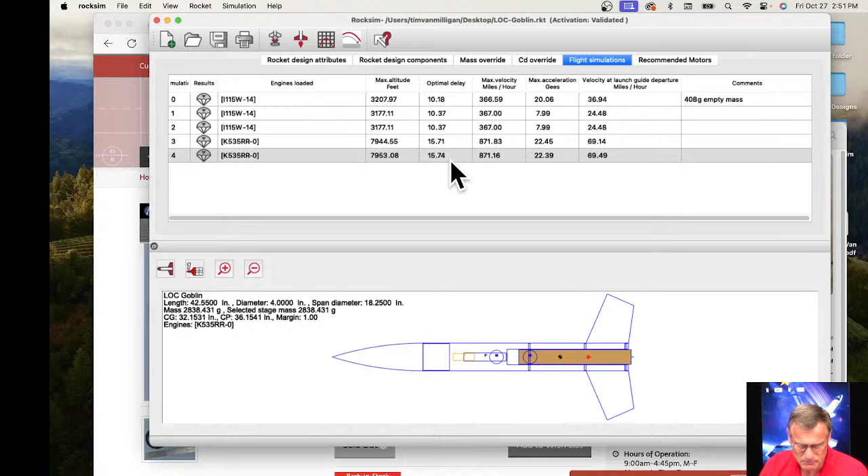Yeah, so designing any rocket, it doesn't really matter what size it is. It still takes about the same amount of time if it's a small rocket or a big rocket. So hopefully that answered your question, Julie.

Alfred Indy has a question. It's a fun one. On the moon, can you launch a half-A motor and have enough thrust to lift an Apogee Zephyr? Okay, I can't do it in RockSim because we can only simulate on the Earth. So I'm going to have to do it in our head. So go here to the Apogee Zephyr. Type it in, find the Zephyr, and what I'm looking for is the weight. It has a weight of 44 ounces or 1,247 grams or 1.2 kilograms.

Okay, so now we're going to go to the rocket motors. So what did we say the Zephyr weighed? 1.2 kilograms. So now divide that; on the moon, it's 1/6 the mass, or no, 1/6 the weight, not the mass. It still has the same amount of mass, but the weight will be different. So we'll divide that by 6. So 1.2 divided by 6 is about 200 grams on the moon is its weight. So now the question is, can a half-A motor lift 200 grams?

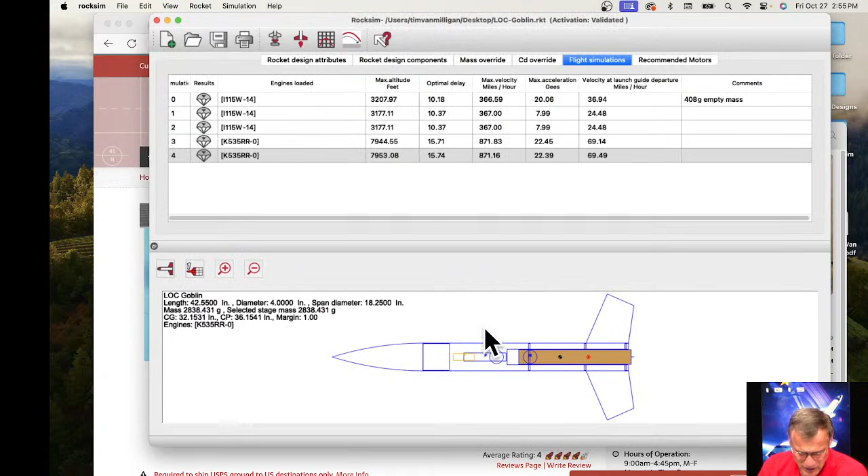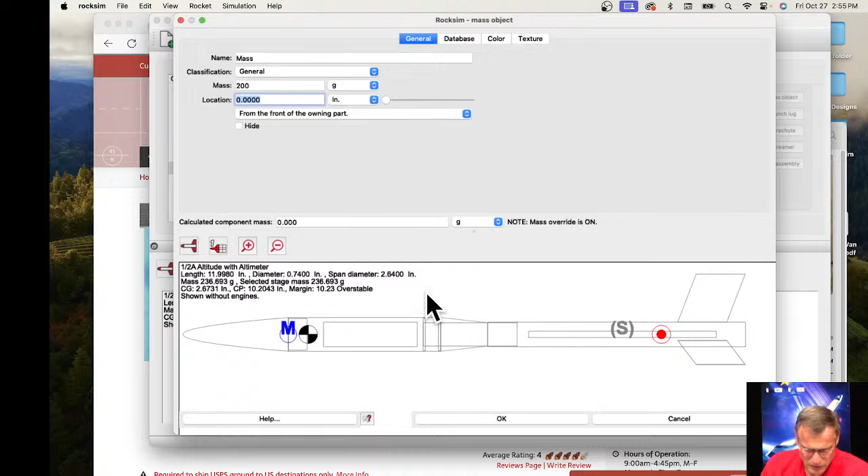Cancel out of that and make the mass 200 grams. That'll be close enough. I think I have two masses in here. I have that mass, forward, aft. Okay, so that's payload altimeter. Let's take that out. Delete. Yes. Okay, so we're 229 grams. That should have been 30 grams.

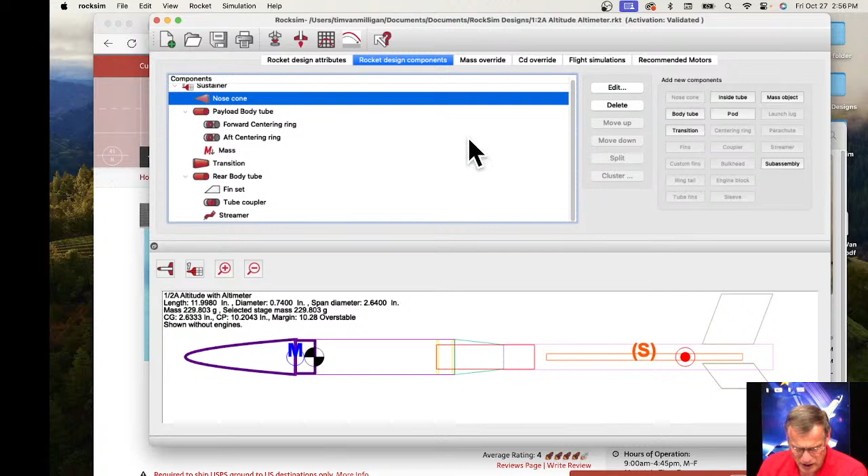Okay, and then we want to put in a half-A motor. Choose an engine. Click OK, and then launch it. Let's see if it leaves the pad. It did. It got up to 1.6 feet. So it did leave the pad. So you could launch a Zephyr on the moon with a half-A motor, but it's only going to go that tall. It's not going to go very high, but you could get it moving. That was a pretty good question, though.

Julie Kaufman has question mark, question mark. What does that mean, Julie? Terry wants a Z motor. Can we design a faster than light rocket? No. Einstein says no. I think that's all the questions.

Oh, we did have the question about a boost glider in RockSim. Oh man, we're like out of time on the boost glider. Let's see. Do I have a boost glider in here?

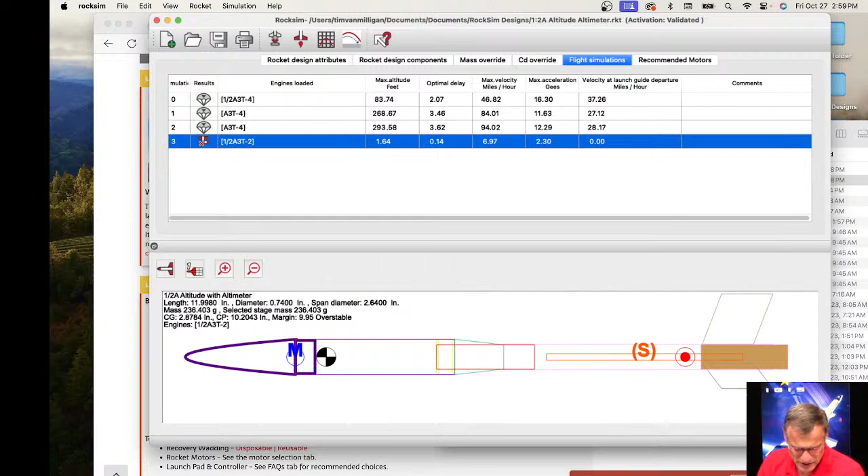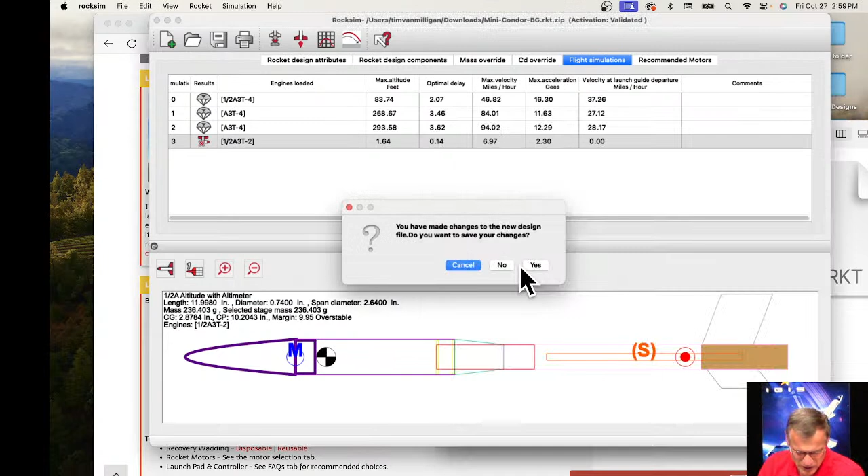Let's try this other one. Oh, because it was a zipped file. I gotta unzip it first. Oh, I unzipped both of them. There it is right there. Okay, so the mini Condor, if I open it this way, save my changes? No. Okay, so there is the mini Condor. Let's see if it's set up as a two-stage rocket. Nope, it's set up as a single stage.

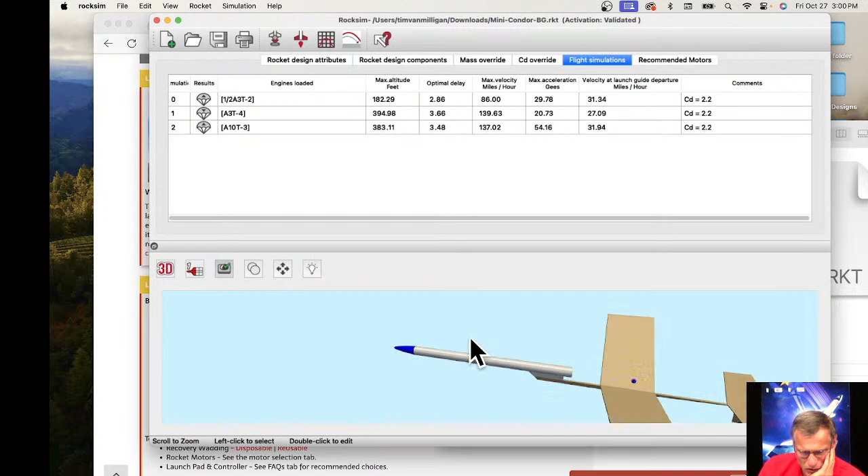So you can design it in RockSim, but it's not set up as where the pod falls off like it does in real life. In order to do that, that's why I was wondering if it was set up as a two-stage. Because that's the only thing I could think that would allow us to simulate it where the pod falls off. But does the glider glide? And the answer is no, because RockSim assumes that all the fins are on straight and they're not canted.

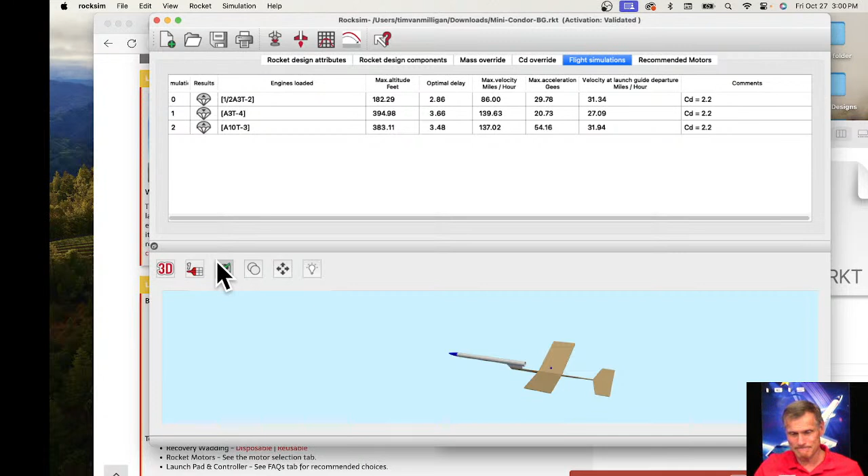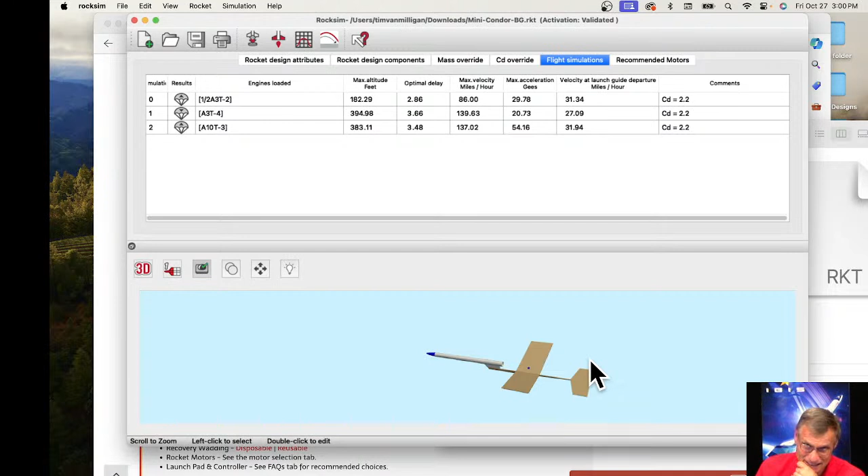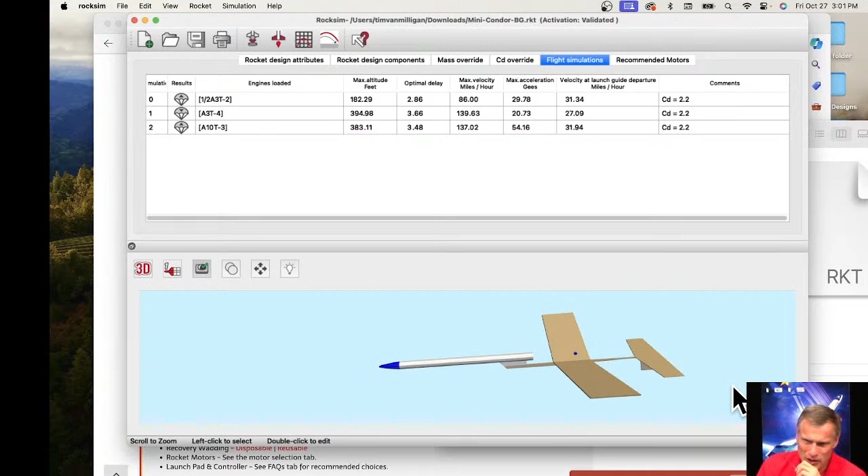I really need to work on something to do a sample design of a rocket where the fins are canted, and see if it actually does glide in 3 dimensions. I'm not sure. It might. You'd either have to use RockSim Pro or the Launch Visualizer, because those allow you to cant the fins, where RockSim itself does not. RockSim's our older software. It's the cheaper one. And it can't do everything that RockSim Pro can do or the Launch Visualizer.

So there is a boost glider. If you go to the Apogee website and you look for the Condor boost glider, then you can download a RockSim file for that rocket right there. Let's see, there's what it looks like. The pod falls off for descent, but it needs it on there for ascent. Yeah, that's about how big it is. It's not very big. There's the pod. And there's the wing dihedral. That's what makes it so cool, is that thing.